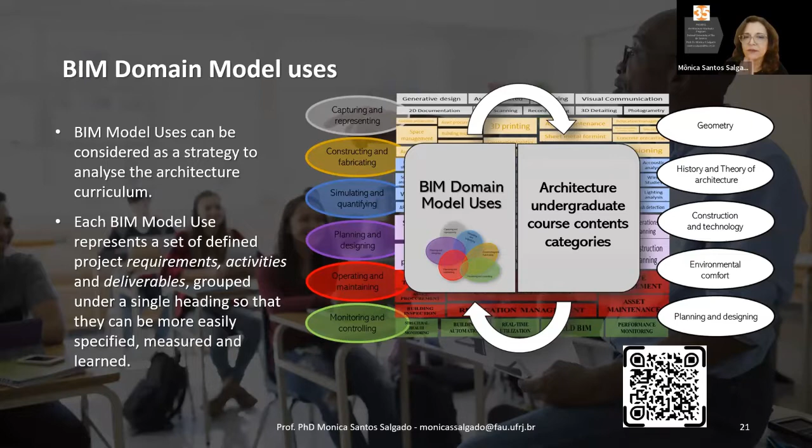So this is part of the research that we are developing, and there are, of course, other ongoing actions.

For example, we are promoting workshops with professors and BIM experts, so they can discuss the possibilities to incorporate BIM in their classes. We also have BIM cell laboratory installation with some new computers and support so we can work properly with BIM tools.

There's also the creation of a new class entitled BIM in Architecture Education, which has been offered to master's and PhD students of the Federal University of Rio de Janeiro. In fact, it's very interesting, because although the title of the class is BIM in Architecture Education, we are receiving students from the civil engineering graduate course. So this discipline called the attention of different students from different parts of the university.

The results were so promising that we are now organizing a book with some of the suggestions and solutions presented by the PhD and master's students participating in this class. We intend to publish this book at the end of this year.

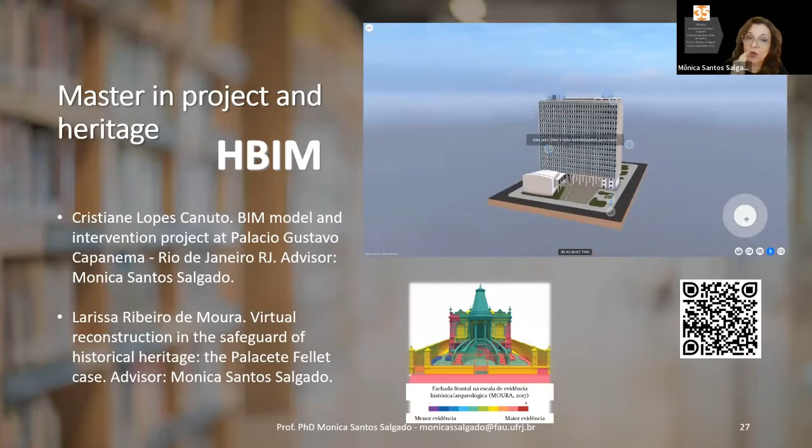I had the opportunity to be the advisor of these 2 masters recently presented in project and heritage. The first I'd like to share had been developed by Cristiane Canuto, entitled Model and Intervention Project Palácio Gustavo Capanema, a BIM model and intervention project at Palácio Gustavo Capanema, developed under my supervision. Cristiane is an architect, and she decided to reconstruct digitally the Palácio Gustavo Capanema, which is an important Brazilian building, a very important representative of modern Brazilian architecture, located in Rio de Janeiro city.

She decided to reconstruct it digitally and to propose an intervention on the last floor of this building, because it has a beautiful view of the Guanabara Bay. If you haven't visited my city, please, I will be very happy if you come here to visit.

This model had been prepared using ArchiCAD, and through this QR code, you can download this model. It is online through the BIMx website of Graphisoft, so you can download this model.

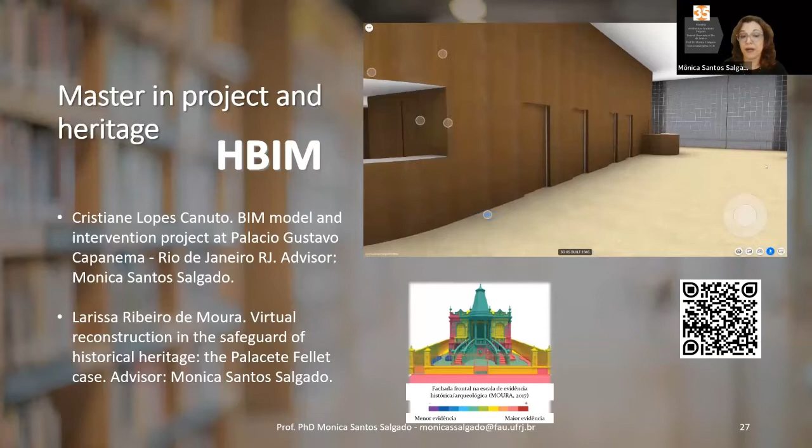In fact, Cristiane prepared 2 models of this building. The first one is the model as it was projected, the original model. And the second one is from 1945, what has been built, because it has some changes from the original model. And one of the architects that is part of the team, the dream team, it's truly a dream team, the author of this Palácio Gustavo Capanema building, is Oscar Niemeyer. So this building is very important for us, and I invite you all to get this model, this BIM model, through this QR code here.

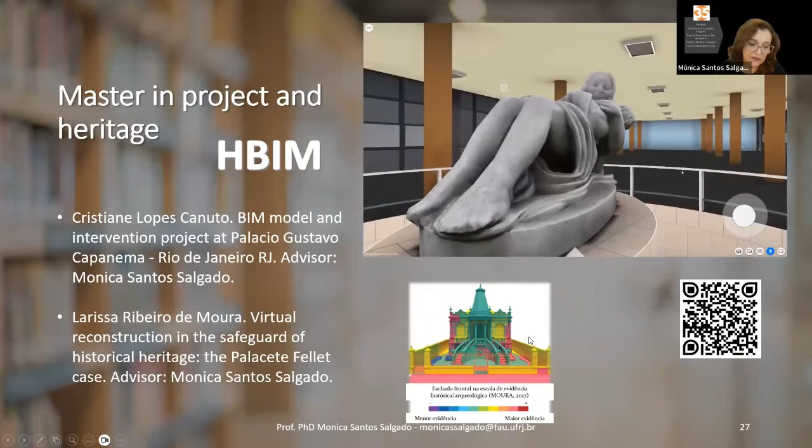And also I had the opportunity to be the supervisor of Larissa Moura, who developed a research entitled Virtual Reconstruction in the Safeguard of Historic Heritage, the Palacete Fellet case, which is a very old building in Juiz de Fora, the city that I mentioned before. It was in very bad condition, in fact, when Larissa started her research. And here, in the bottom part, the reddish part of this image represents details of which Larissa was able to obtain architectural evidence.

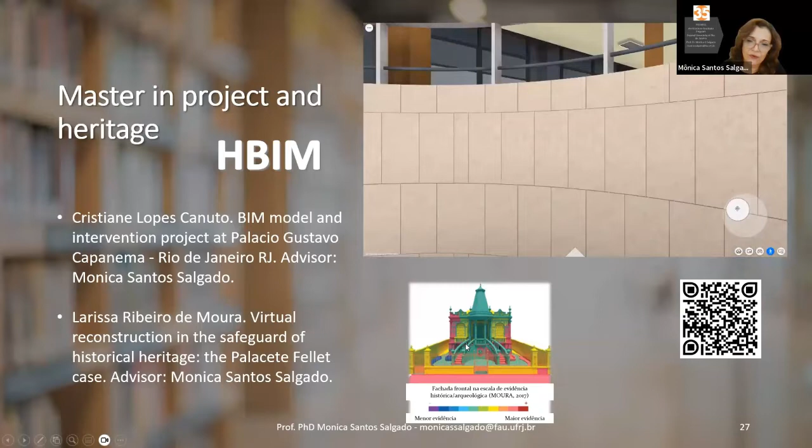And the bluish part represents details that she only had information on through photographs, paintings, and other records, because the building, unfortunately, is in ruins. But what is important is that both students explored the possibilities of what we call HBIM, heritage BIM, historic BIM. So these 2 research projects bring us some possibilities, for example, for using BIM during undergraduate courses.

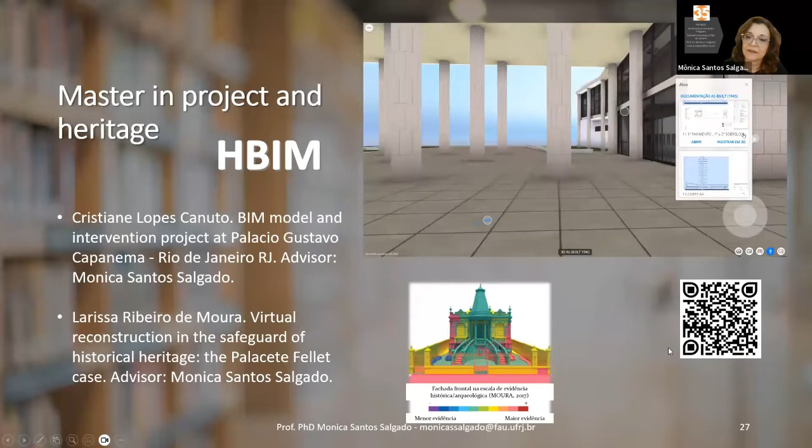Okay, another research I had the opportunity to be the advisor of has been developed by Bianca Leal, Using the BIM Platform in Teaching Architecture: Challenges and Propositions. I can say that this was, in fact, the beginning of BIM Cell. The development and the approval of this research was the beginning of the discussion of the BIM Cell in my institution.

And I also had the opportunity to be the advisor of the master's dissertation developed by Eduardo Ribeiro, which explored the potential of the adoption of the BIM platform in the approval process of building projects, or in verifying the rules established by building regulations, to support architects, to facilitate the life of architects, because there are many rules, many regulations that must be considered, I believe not only in my country, but all over the world. So building information modeling can also help professionals in this task, in this challenge.

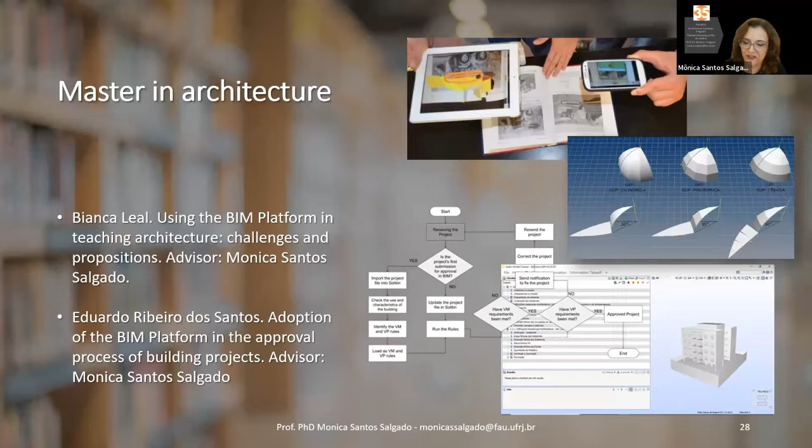And I'd like to share another PhD. The others were master's dissertations, but this is a PhD that I had the opportunity to supervise together with Professor Eduardo Toledo, a professor from the State University of São Paulo. Cristiane developed a thesis on BIM macro adoption: a BIM macro adoption instrument for automating maturity assessment on the noteworthy publications component. This thesis aimed to design a system that allows the automation of the BIM macro maturity assessment, which has been developed by Bilal Succar and Mohamad Kassem, two experts in BIM. Bilal Succar is related to Melbourne University, and Mohamad Kassem is a professor at Newcastle University.

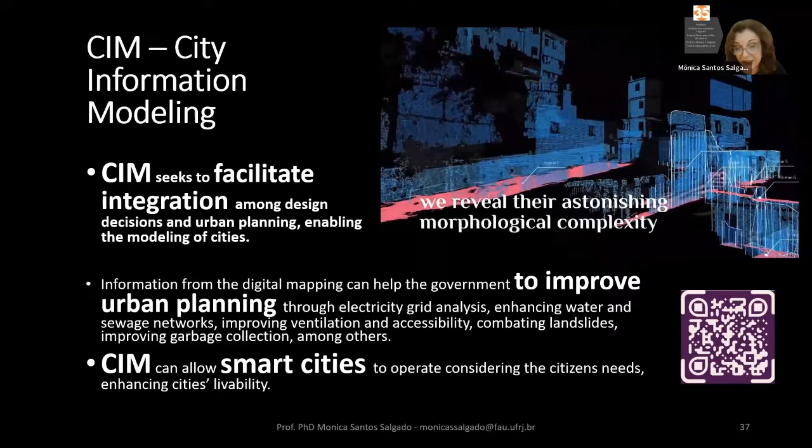And it's very difficult to plan any possibilities, the urban services that we want to meet the necessities of the citizens in this complex urban settlement. So they decided to get through point clouds all information about the buildings, particularly in the main street of this favela, in order to think how to operate, how to best make these urban planning decisions to improve the life of the citizens in this important settlement.

So CIM, city information modeling, can allow smart cities, of course, to operate considering the citizens' needs, enhancing cities' livability. There are 5 main vectors of smart cities, which are digital transformation, urban environment, mobility, governance and finance, and inclusive and sharing cities. And each of these vectors works with specific questions to be answered, and measures that must be adopted in urban planning.

So, for example, when we think about mobility, how can we fulfill the promise of reducing travel time and saving money with environmentally friendly options? Inclusive and sharing cities: how can cities cope with the future of the work revolution while ensuring that no one is left behind? These are some of the discussions that we have during the Smart Cities Conference all over the world. And we think they must be answered properly.

Particularly when we think that a smart city is not only a digital city, an intelligent city, a truly smart city must be sustainable, must be resilient, must think about citizens. And in fact, when we look at the 17 Sustainable Development Goals through the lens of the vectors of the smart city, we can see that all 17 goals can benefit from these vectors. So we think that not only must a smart city be sustainable, but sustainable cities must be smart.